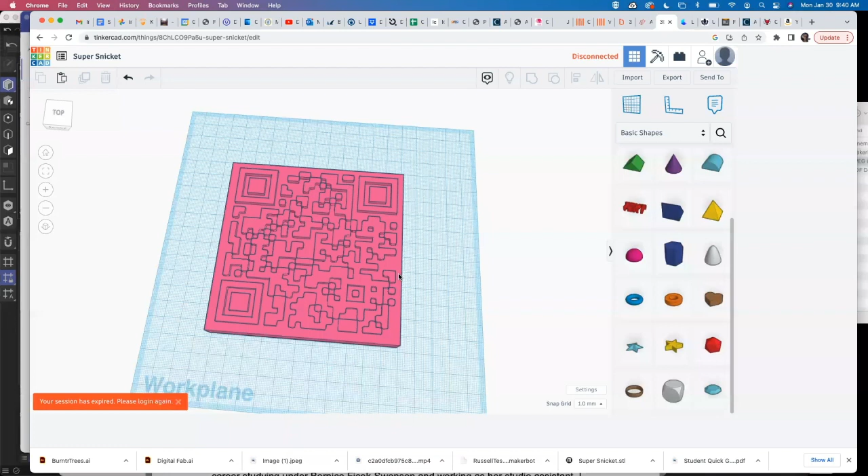So if we're in TinkerCAD and we have our model all set, the first thing you want to do is check the dimensions of it. Looks pretty good, 100 by 100. I wouldn't go bigger for this project than 100 millimeters, just so it prints faster.

Then what you'll do is go export STL, and it'll automatically name it some weird name like Super Snicket, and pop that into your file. That STL is not what we upload to the cloud print. If you send that, the TAs won't print it because it needs to be sliced first, okay?

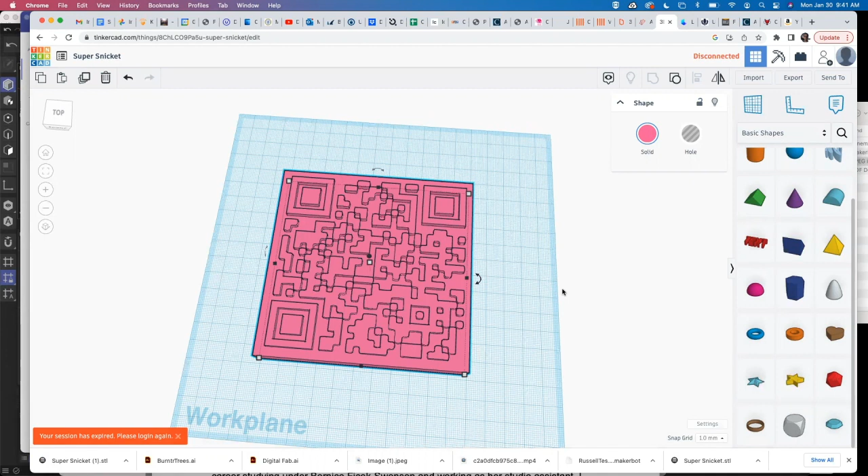So if we log into the cloud—what is it again? Let's see, cloudprint.makerbot.com. Okay, so this would be the normal view that you would get.

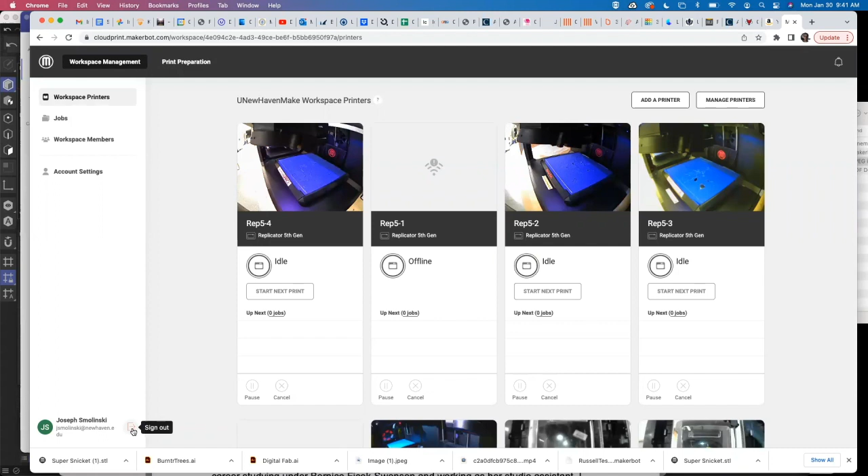This is me, and I have credentials for the software, so I'm going to have to sign out of here in order to sign in with the other credentials that I used. My recommendation is you can actually slice on the cloud, but the problem is you have to log out to log back in to send it. And I feel like that's a pain. It's a pain.

So two things you could do. One, you could download Makerbot Print on your own computer through that link I sent. Or it's also advisable to do the slicing over in the lab, because then you know which printer is available and you can slice it for that individual printer.

So if you go over there and all the sketch models are currently printing, you can send it to the Replicator 5th generation, for example. There are two computers—well, actually three—that you could jump onto in the makerspace and just open up Makerbot Print and work from there.

So if you have a question about that, just ask the TA, or if you have it downloaded, you can do that as well. So what I'm going to do here, once I have Makerbot Print open, click on Add Model.

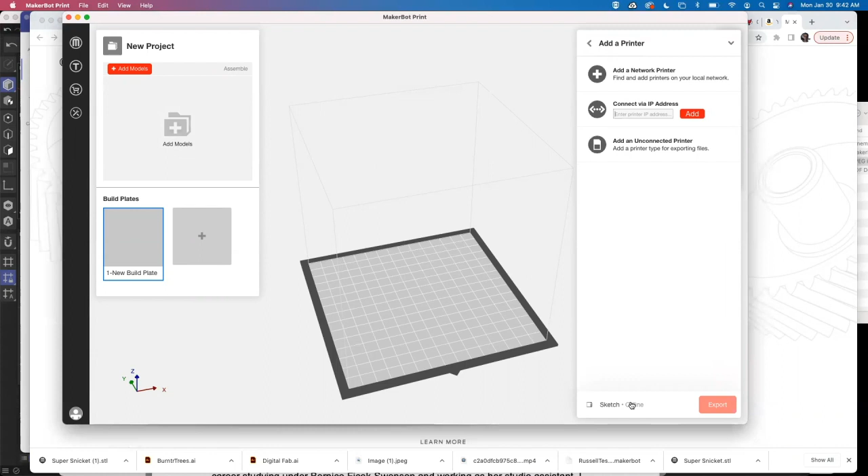Actually, no, I'm not going to do that. Before I do that, I'm going to decide which printer I'm going to choose. So click on the bottom left here, or the bottom right, for the model that you're using. You can add an unconnected printer.

And the models that we have are the Replicator Plus—those are on the far right, the bigger models. We have the Sketch—those are the smaller ones. And then we have the Replicator 5th generation, on the left side.

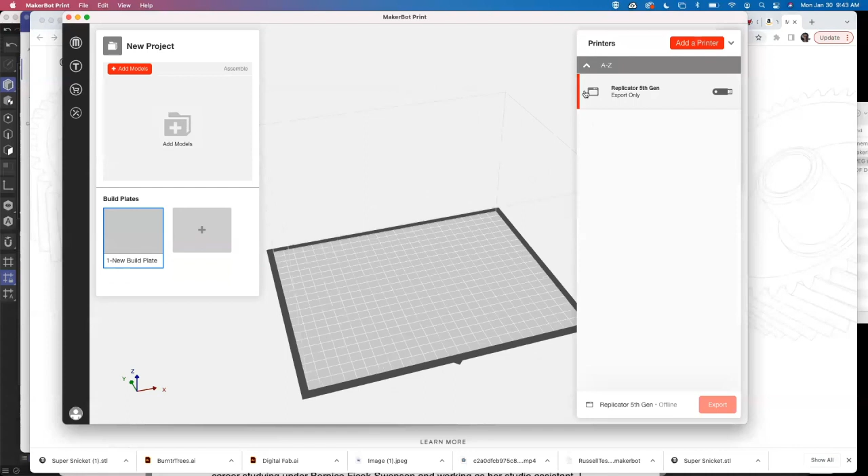When you select a different printer, it's going to change the build platform, so that's why it's critical to slice for the individual printer you're using. Once you do that, you don't hit export, you just click outside of here. Just note that you have the right printer on the bottom right before you bring in your model.

So I'm going to grab my model, which is labeled something weird, Super Snicket, and open this up. It'll pop the model directly in the middle of the build plate, which is great. If you need to move it around, you can click it.

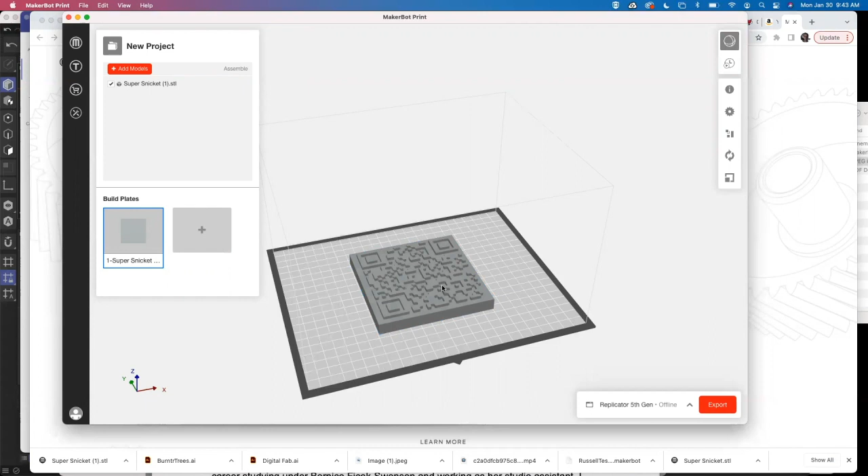Oh, it's not responding. It's always great when you're recording and then nothing happens. Isn't that fun? Okay.

Well, at any rate, let's see if we can look at our print settings. All right, so with this printer, pretty much the only thing you're going to need to make sure you have selected here in the print settings—balance mode is kind of what the default is.

The infill density can be critical. If you've got a really big print and you notice it's like 20% infill, or 15%, that's just the inside structure. So something that's flat like this isn't going to be carrying any weight—10% is perfectly fine, I could probably even bring it down to 5%.

The other thing you want to do is make sure the support type is set correctly. This model in particular doesn't need supports because everything is flat and there's nothing overhanging. If there was a model that was like a sphere, or a figure with an arm sticking out into space, that would need some bridging to connect it together. So if you have something like that, make sure you click breakaway support on. Even if you click this on and don't need it, it won't add supports—so it's good to just click on it anyway.

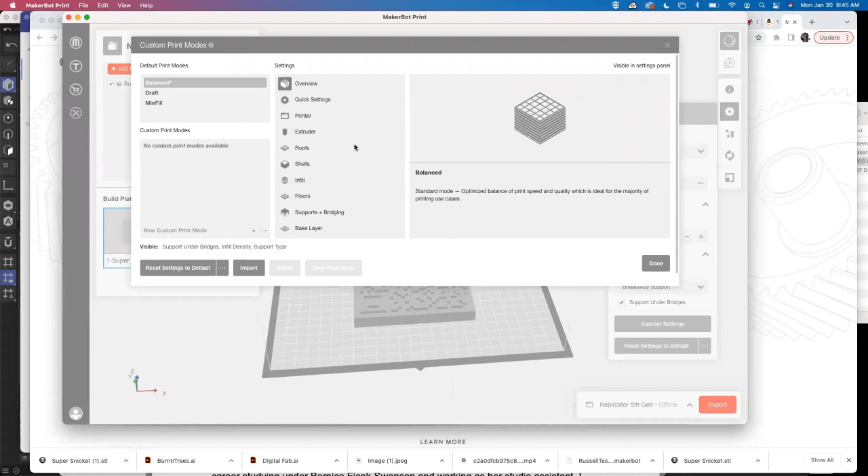Then these are the custom settings. The only thing to note here would be the base layer—you just want to make sure the raft is on, especially for the Replicator 5th generation and the Replicator Plus. Once that's all set, you can hit done, or click back to turn it off.

And then this is the estimate, print, and preview mode. It's going to slice and be really slow because I'm recording. Effectively what that's doing is building layer by layer how the extruder is going to add filament to each individual layer for all the parts.

Once this is done, you can export it. The file you need to upload to the cloud is a .makerbot file—again, it can't be an OBJ or an STL or anything like that, it has to be a .makerbot file.

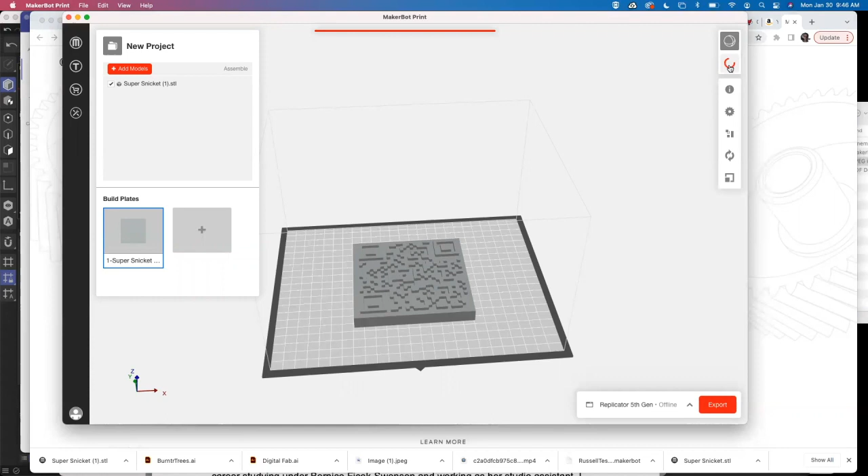Oh wow, it's really slow. Okay, this is what I'll probably edit out of the video—me just rambling. Okay, there we go.

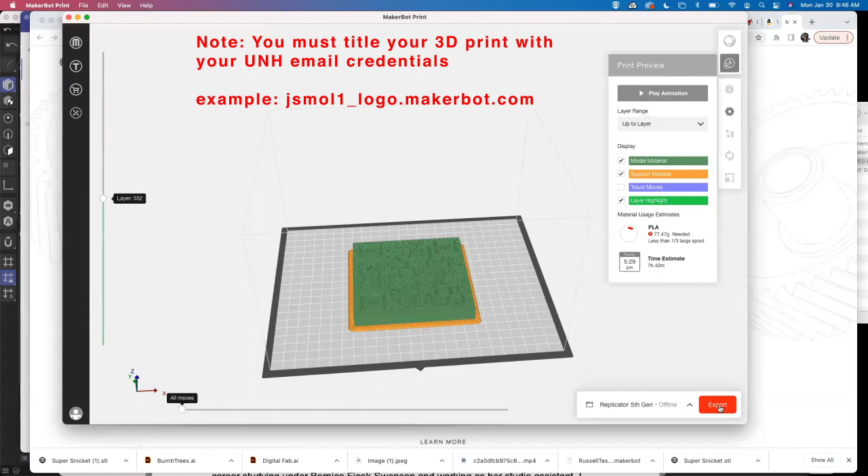So it should give you a print preview, showing you all the steps that will print, and it's ready to go. Now we can export it. This is where you'd want to save it to a drive or something like that—I'll just save it here, and it'll save, and then it's ready to go.

So then what you do is go to your Makerbot cloud—cloudprint.makerbot.com. Again, it's too hard to figure out what this giant word is, so I'm just going to copy it because I'd type it in wrong a bunch of times and get really frustrated. Same with the password—I'm just going to copy and paste it in. I guess I could probably remember that one.

Okay, sign in. This spinning thing is arbitrary—if you just simply click jobs, it will pop that up, so don't wait for that thing to spin, I don't know why, it's just a glitch. Here you're just going to choose your file and submit your model. So here we go, submit the model. And then that's it, that's all you need to do.

If the model doesn't print well, the TA may reach out and say, hey, this is too big to print, or it's too small to print, or whatever. Feel free to check it with me first if you like, or even ask a TA before you send it—you could definitely do that. But that's it. And then when the job is done and ready to be added, it'll be added by the TAs, and then it'll be available in the cart to pick up.